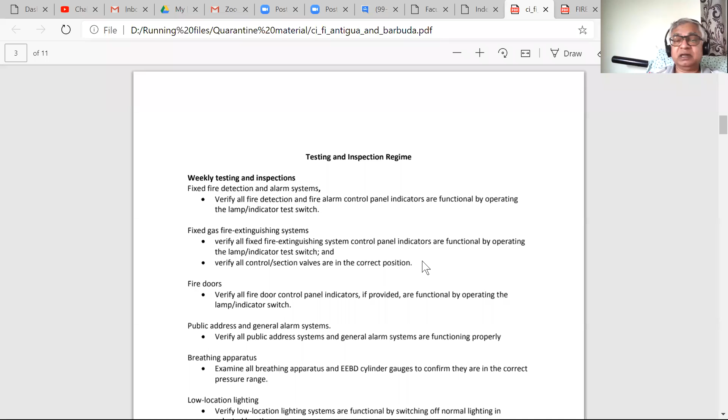Breathing apparatus, you inspect the whole thing, and check there is correct pressure, because the main thing is the pressure indicating correctly. It should not happen that the cylinder leaked out and you are not aware.

Low location lighting system: switch off the normal one and see that this one is working, it starts automatically. Low location systems, so this is just a question of switching off main lights and checking it.

If you have got water mist, spray, sprinkler system, all alarms are functional, meaning you do all the testing as given by the manufacturer. And everywhere there are some arrangements on panels to do the self-testing.

So the same thing continues, and these valves again, like I told you, you can have a moron on your ship who changes the valves without realizing, because he went there for checking something, did it, then forgot. You get this once in a while, so you generally keep on checking this.

Now one method used on ships is we do color coding at times. That means the indicator must be pointing at the right color, whatever the valve position says, meaning it is open or closed, whatever is the normal position is marked. So by color coding also you can check it fast.

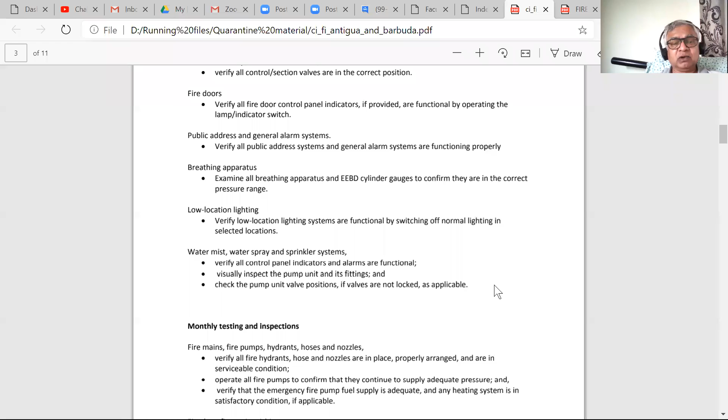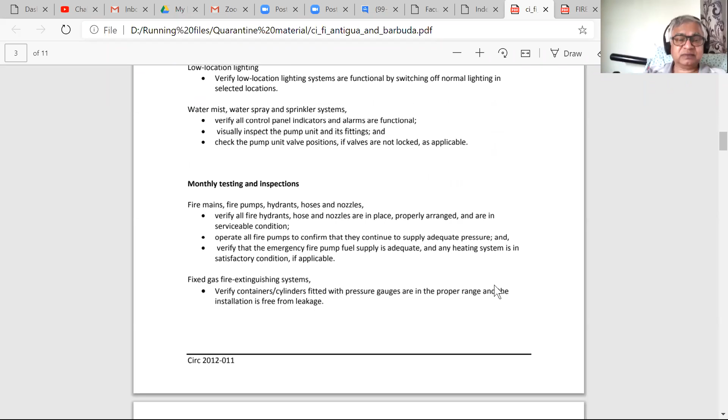Then you have monthly testing inspections, it will go on. But the first one I read out because I thought it's a good idea to start off, and now you all have to read this. Monthly testing.

What happened? Danish is telling me a gas leak happened in Vizag due to valve malfunction. Actually, if you ask me, I don't know the exact reason, but that plant is very old, not a new plant. What I read about it, it was a very old plant which was taken over. So probably the equipment is very old, and with this problem of COVID, it's possible their regular maintenance or inspections did not happen, and it ended up in a malfunction, killing people. That is the sad part. But when equipment is old, this is one of the issues.

We had an issue in Mumbai docks actually, with abandoned cargo. There was some abandoned cargo with gas cylinders, and as usual, once it's abandoned, there's lethargic stuff going on. The customs are not bothered; they only want money, but they will not allow you to sell it off, saying there's not enough money and so on, because writing off money is more complex. So it just happened that the cylinders became too old, lying there for 10-15 years, and some cylinders leaked out. Then there was a lot of panic. As usual, meetings took place, and we should do this, we should do that. But in the end, I don't know what happened, whether they destroyed the cylinders or not.

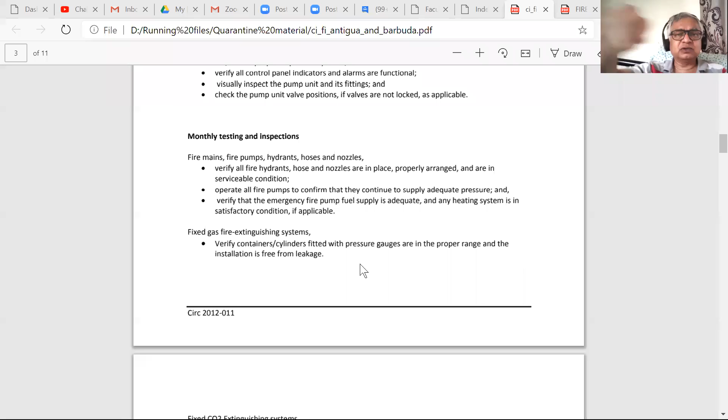Like see, okay, this part - verify container cylinders fitted with pressure gauges are in proper range. Now, leakage detectors are also there on the ships to detect. There are small sensor-like things which you check and see, oh, this is leaking. There's a lot of equipment on board. That is what makes our job special.

And our expertise - see, generally shippies don't talk about their job when they are ashore. What we do on the ship, we know. And we believe in something like perfection. Like I told you, we don't like to have any error margins, and we don't have extra people.

So what we do, we ensure each and every job is done perfectly. When you say yes, it is accepted yes. When you say no, it is no. No place for bullshit around. If you do that, you are going to get thrown out. You're going to get caught, you are going to get thrown out.

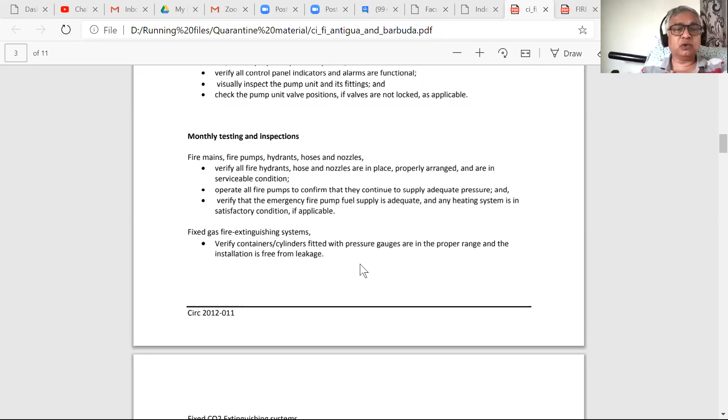Our ship is a big investment which doesn't get any help from shore or anywhere. When it's a big investment, today a 20,000 TEU container ship, when she is loaded, she is worth about 1 billion US dollars. Now 1 billion is 1,000 million US dollars, it is a huge amount. So all of the engineering and designing involved takes care of all possibilities known to us, and that is why we have got all sorts of things. This is the reason why we have got people on board to do this testing, checking, ensuring everything is okay.

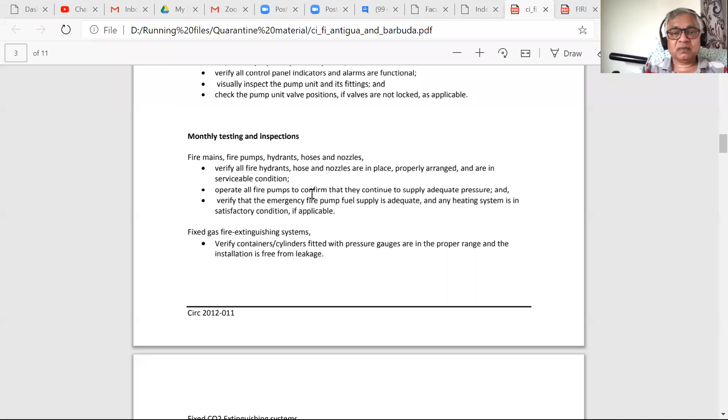Now, I want you all to go carefully through this. You are not going to remember each and everything, but you will find the common things. The common things you must know perfectly. And then you will add anything masala as required, because we don't have manufacturer's instructions, but it tells you what all generally you should be checking.

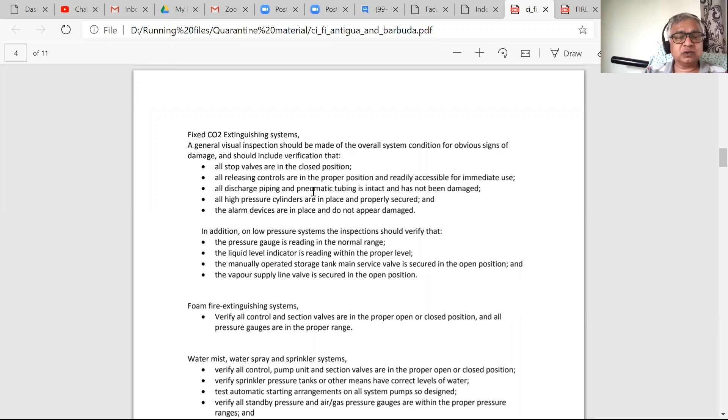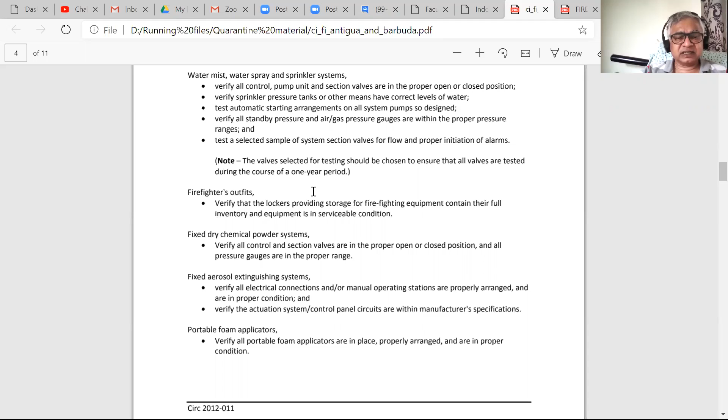Most of the things, verify everything is okay, inspect pressure is okay, inspect the pump pressure is okay, test the alarm, test the lights are working, and like that it is. Now, one of the issues comes up, how do you test foam? If it comes, you have to test the foam. How do you test?

The foam solution sample is taken and sent to a lab ashore. That lab will do full chemical analysis of it and send you the reply. Similarly, when you receive bunkers, the oil is sent to an independent lab who checks it and certifies it, because when you ordered some grade, you must get the same grade. So oils, chemicals, hydraulic oils, everything goes ashore for testing. Similarly, the foam solution also goes ashore for testing.

Now, fixed fire detection alarm system, for example. For this testing, a sample of detectors are tested, meaning a few samples. You decide number 1, 2, 3, 4, 5 will be tested, meaning all 5 will be operated and checked. There is a test kit for testing detectors, with consumables. The ETO will use it and test it. There is a procedure for it.

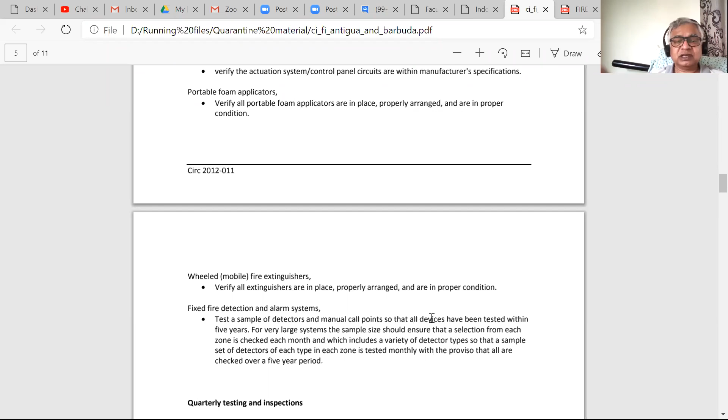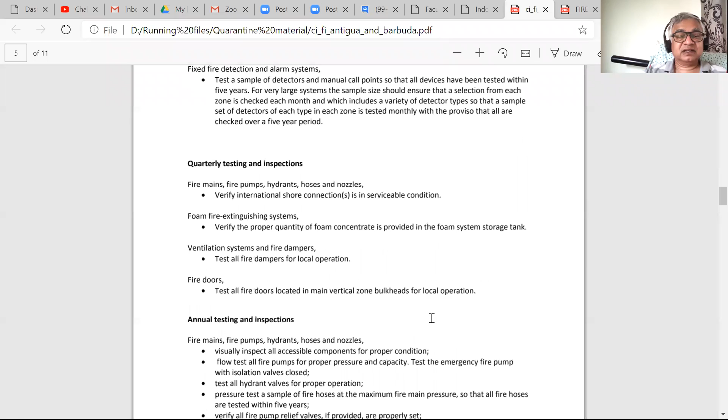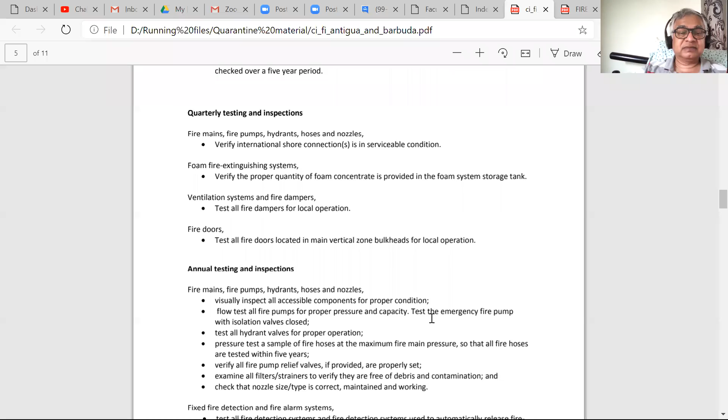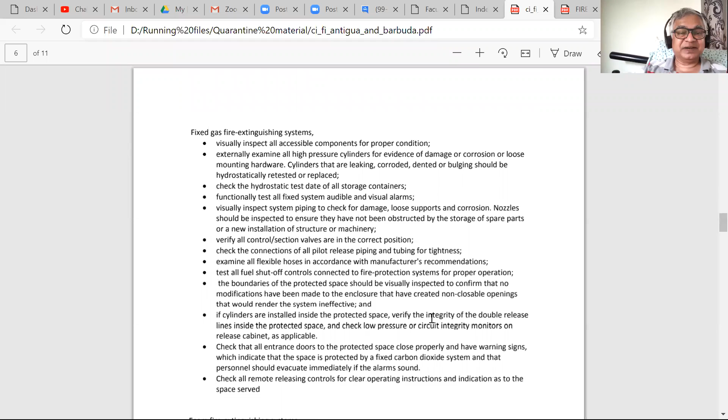Then quarterly testing. You will have to work out the best way to remember, because you all know all sorts of formulas to remember everything in your brain. Annual testing - when it comes to fixed gas detection, you see how much annual testing is adding up. Annual testing is a big thing, no?

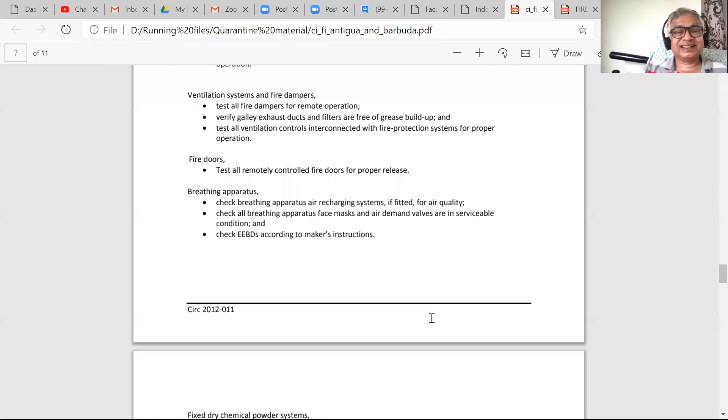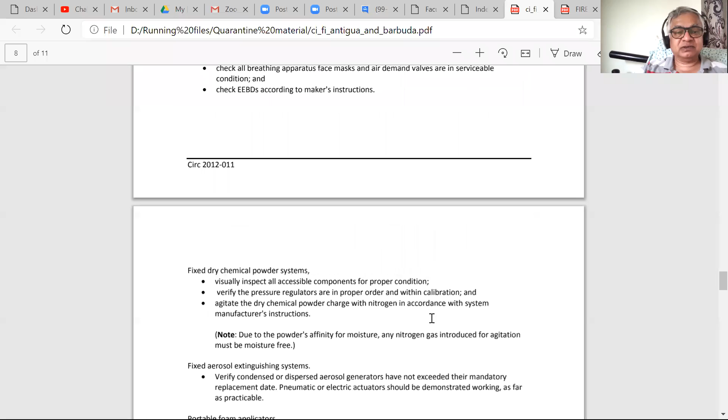One more thing, we passed it here, so I want to tell you this part is there.

Recharging system for breathing apparatus - that means we have a compressor on board which we use to fill our cylinders. That is a medical compressor. It doesn't use oil, it has a specialized system which filters out oil from the compressed air, because otherwise the compressors would use some sort of lubricant. The mist of it would get mixed up with the air, and if you breathe that same air, you'd be breathing oil mist into your lungs. That is the reason that compressor is separate, and technically it refills at much higher pressure, like 200 bars, that is 200 atmosphere. So it is a different one, but ensure that when you are checking this, you check that filter.

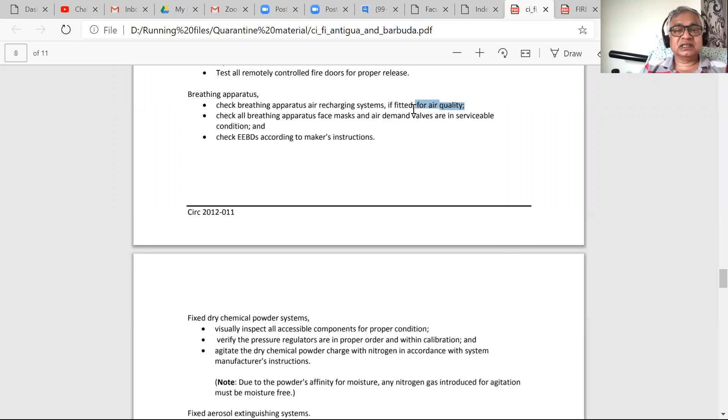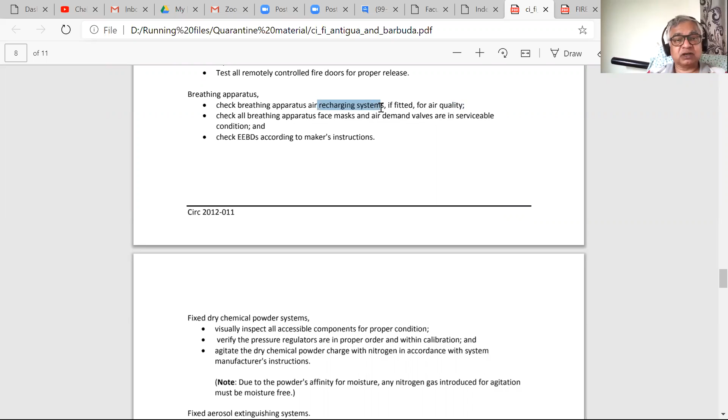If specialized filters are used there, they will also have some sort of checking system or shelf life - they will say every year you must change its filter. So this is what you have to remember. Now this is breathing apparatus, but we are talking about the recharging system here, not just the cylinder. We're talking about what is filled in cylinders - there is a compressor. What happened?

Earlier days we never used to have it, and during my time only, we started fixing it on ship, because when you send it ashore for recharging, they charge you. The bill is typically like this: Transportation, $500. Charging, $25. So we used to get this sort of bills. So it was realized that why don't we start putting these compressors on board - it is easy, a small portable unit, like a bag you carry, your luggage that size, and just plug it in. Other end you connect, it charges. So after that, every ship started changing over, and now today's ships are built with it.

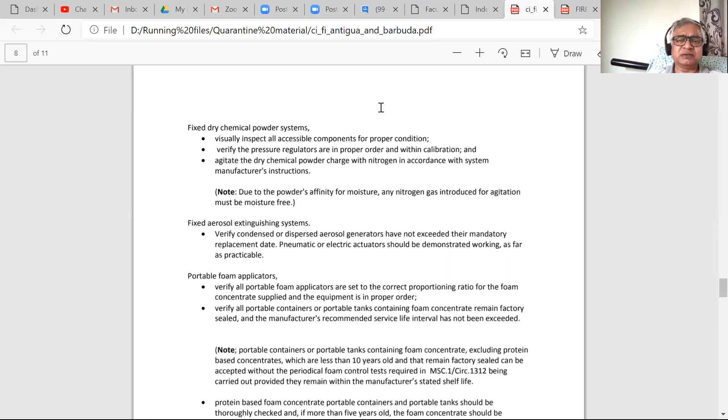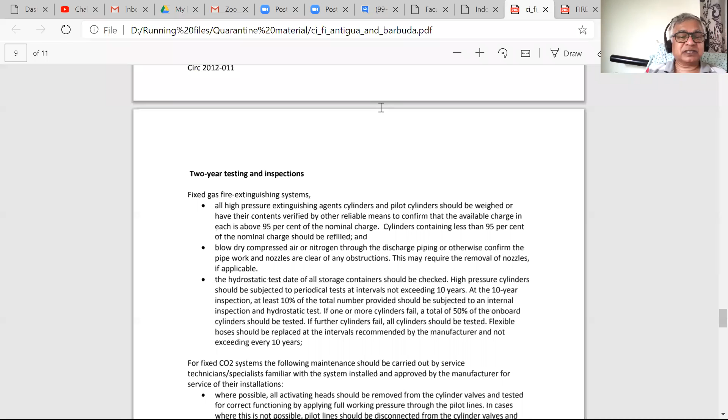Two-year testing, inspections - this becomes more complex. Generally here, you will have shore-based people, because you generally don't do much on board. The skill may be there, but you may not have the equipment. So normally 2 years and above, it is done by shore specialists, like here you see.

Technician specialist familiar with the system. So this is what happens after 2 years. Normally this is done in dry docking, because it needs a certain amount of time.

And so the shore-based guy comes, and if you're going to stay in a port, then the guy will say, okay, he can do all the CO2 system, but he needs, say, 12 hours. The guy comes on board, does the job for 12 hours, and goes.

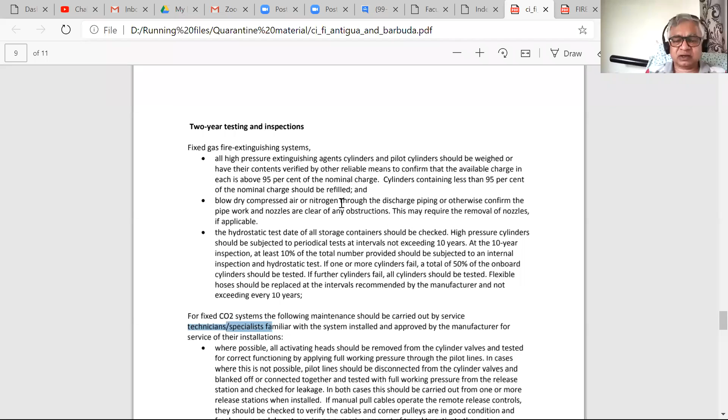Also, since we are on this topic of shore technicians, I must tell you something. When the shore technician is coming to the ship, his time starts - you have to pay him as per time, so many hours, that is his per hour rate. His time starts when he kisses his girlfriend, wife, or partner bye-bye. From that time, his meter starts running.

He is traveling to the ship, and you're paying for his time. When he comes on board, what happens is you show him what the fault is, everything, and let him start working on whatever job he is supposed to do.

And if he is going to take a lunch break or any break, he has to stop the meter running. He has to stop that meter and say, okay, next 45 minutes I'll be eating, so this 45 minutes shouldn't be counted in the charges.

Because once upon a time, we used to get taken advantage of this. The guy comes on board - two things used to happen. First, there was some problem with equipment, we had radio officers and all those, so you call the guy. He comes on board, but by the time he arrives, our local guy has already fixed the problem. So you say no, you can go back, thinking he's not going to charge, but he's going to charge you anyway.

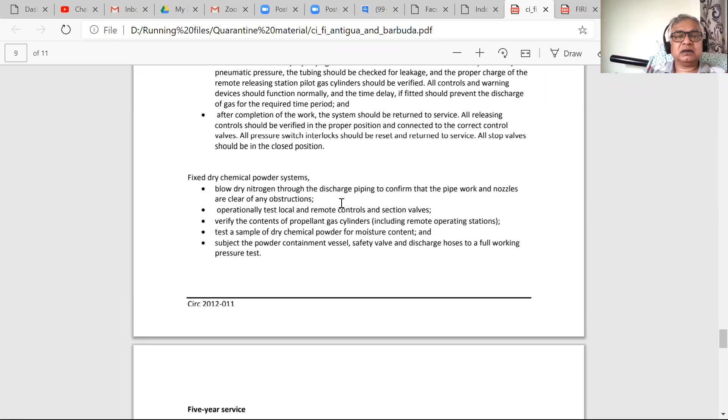Okay, coming back to the longer maintenances, 5-year service and all. This is all shore based.

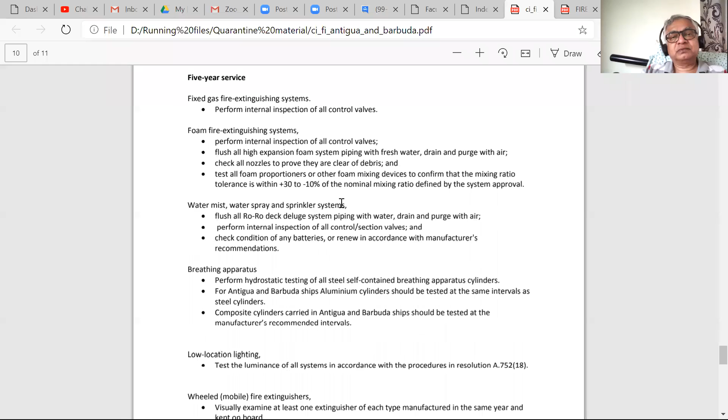Of course, the system is on board, so the guy will come on board. So our local expert, like the ETO for example, or one of the engineers, whoever is designated by the chief engineer, he has to be with the same service technicians to ensure that everything is done.

That means he has to know what all is to be checked. The technician will give you a report saying everything is fine. But how do you know his report is factual?

So somebody is always accompanying him, without interfering in his job, sort of assisting him, learning from him - what is being done here, what is being done there, and so on. At times we have one technical expert with him, and sometimes you need an additional crew member also. If he needs help, you give him.

But at the same time, we are ensuring the job is done properly, because after he has fixed up whatever service he was supposed to give, he goes home. We are going to stay on the ship. That is the reason we have to be more serious, because we are the ones staying on board.

So if he doesn't do anything properly and just leaves, how do you know? This sort of cheating generally won't happen, because there are a few international companies in this business, like Unitor, Drew, and so on, and generally they have a good reputation.

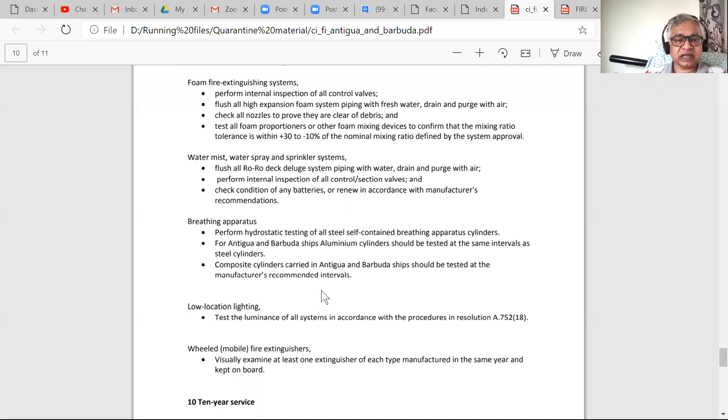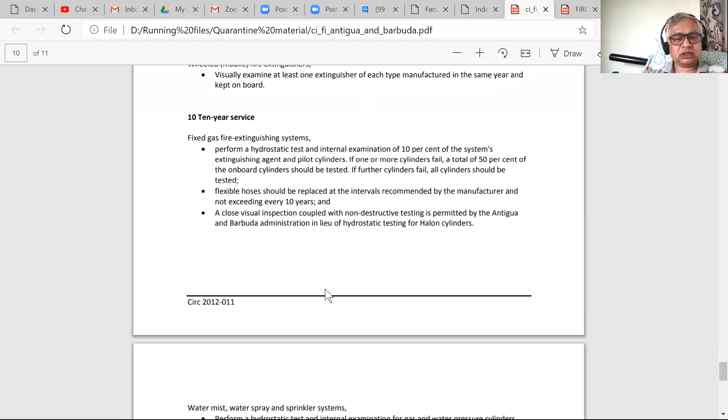Similar things can happen on ships. Our problem is we live on the same ship, so everything has to be in good condition for our own safety. When this 5-year test or 10-year test happens, our technically skilled person has to keep an eye that everything is done properly. When you go through this document, you'll find most of it is straightforward, logical.

10 years means hydrostatic testing. Why? Because things can get corroded from inside, and pressure cylinders may not be able to hold the pressure. So this testing is done.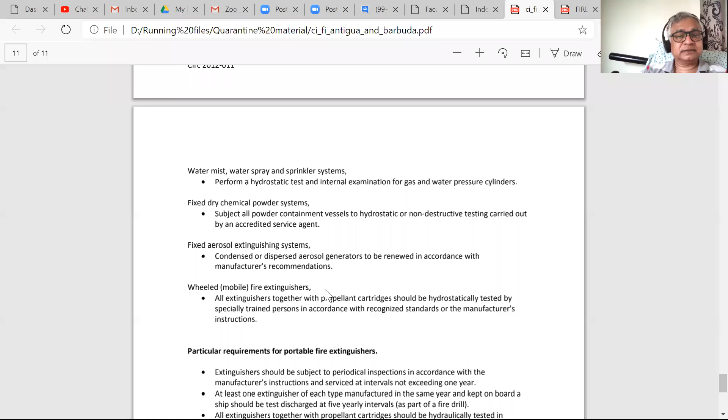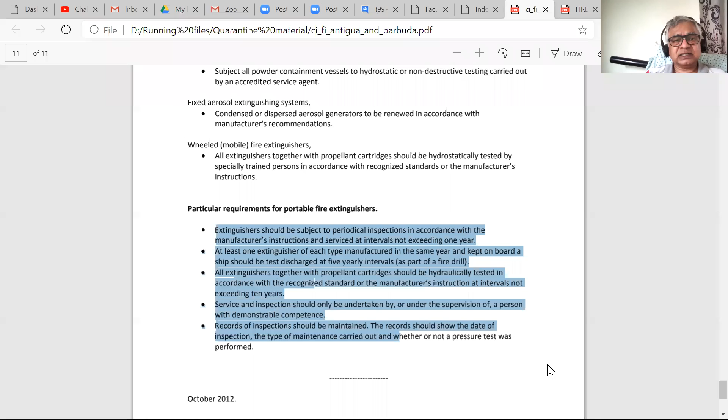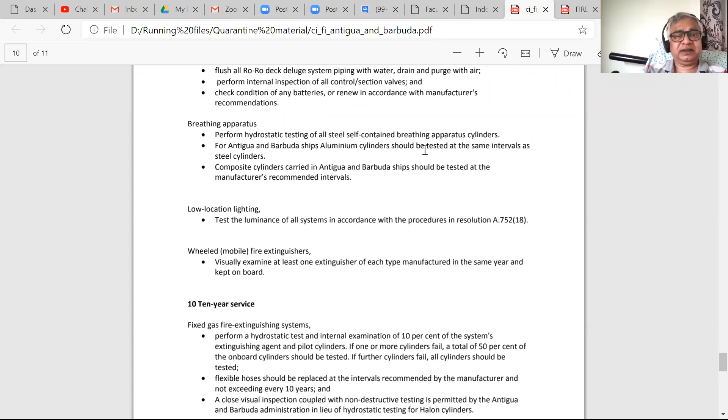Now this is one portable extinguisher. This part you have to do properly because this is something we deal with all the time. Generally, a guy setting the question paper will look for something done on ship, not ask much on this 5-year and 10-year testing. So far as you know, after 5 years something is tested, after 2 years this is tested, fine, but details will be required from something like this.

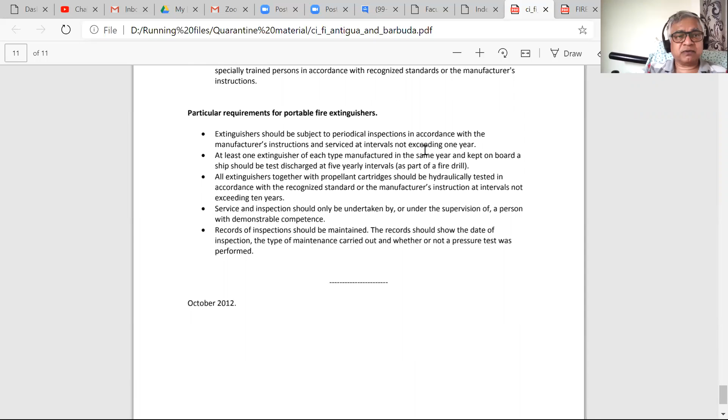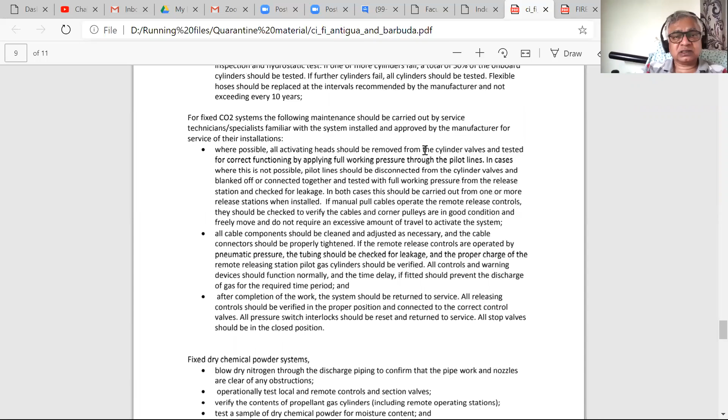Portable fire extinguishers are part and parcel of our life, so we need to know them better. Go through this document. Any doubts, ask me, and you can always put it on my email.

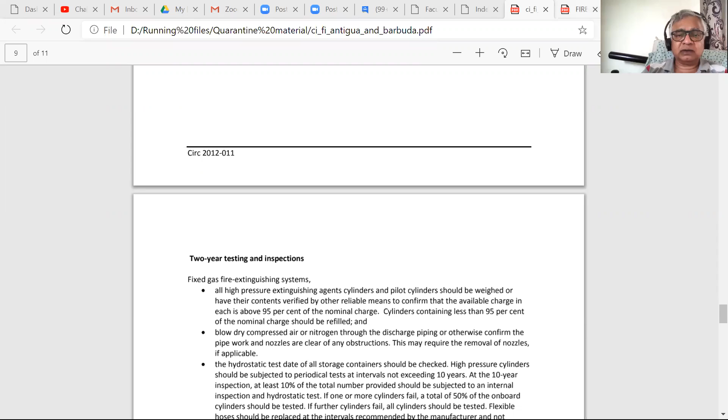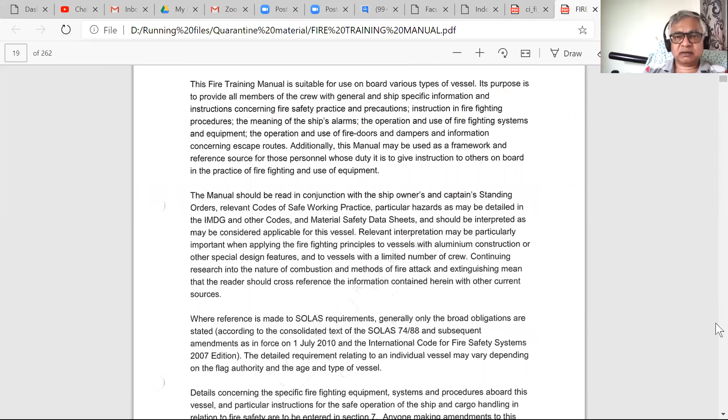The other one we have got here is the manual we finished yesterday. There are certain things more behind it, beyond what we finished. If you get time, go through it. If you don't get time, don't bother.

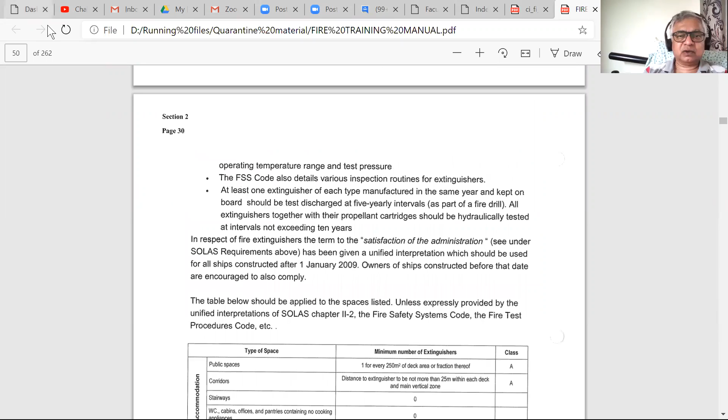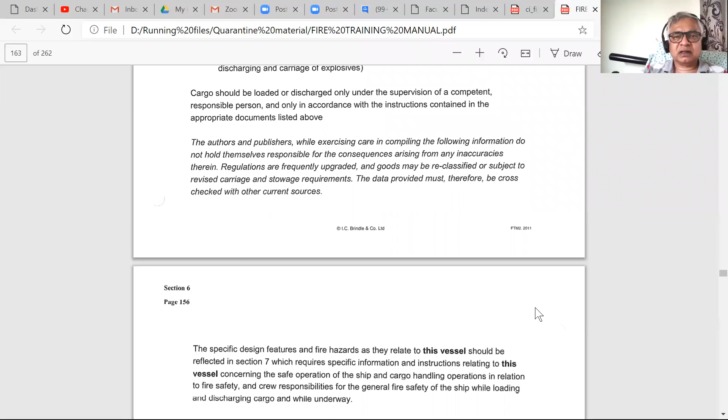This part is something more advanced stuff which you will get under other subjects, especially under cargo work. But keep this document, it is quite interesting for you. Later on, it will come in handy.

Any doubts yet? 65 guys are here and no doubts.

Everybody seems to be here except our regular guys who are missing. But anybody has got doubts right now? I'm unmuting.